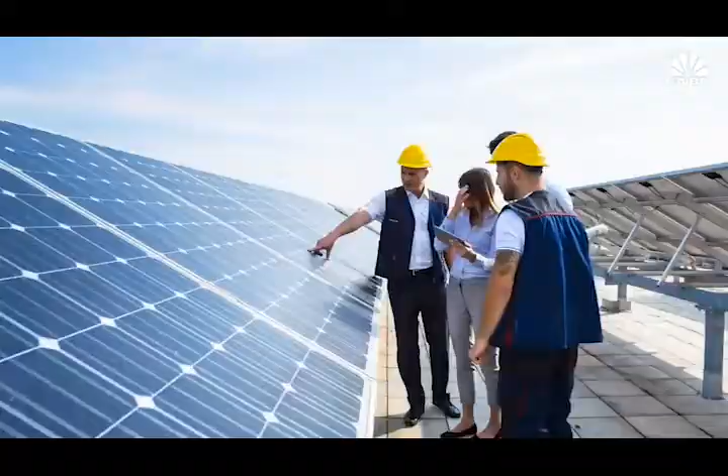Over the past decade, prices for solar panels and wind farms have reached all-time lows, leading to hundreds of gigawatts worth of new renewable energy generation. As the saying goes, though, the wind isn't always blowing and the sun isn't always shining. If, for example, it's a beautiful sunny day and we've got a superabundance of electricity, we can't use it. The question of how to firm renewables, that is, ensuring there's always energy on demand, no matter the time of day or weather, is one of the biggest challenges in the industry.

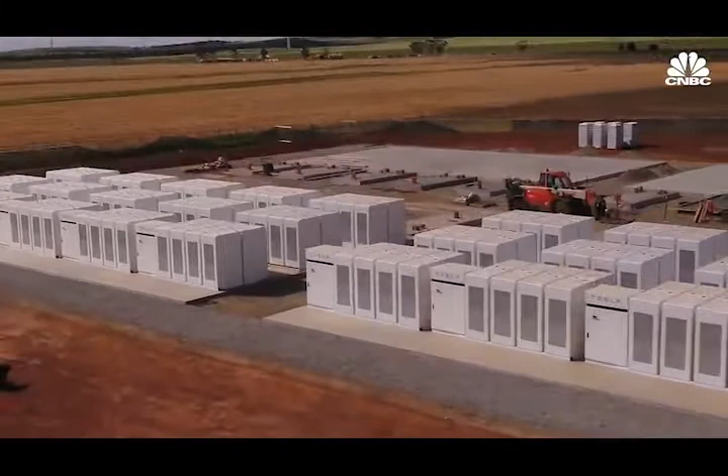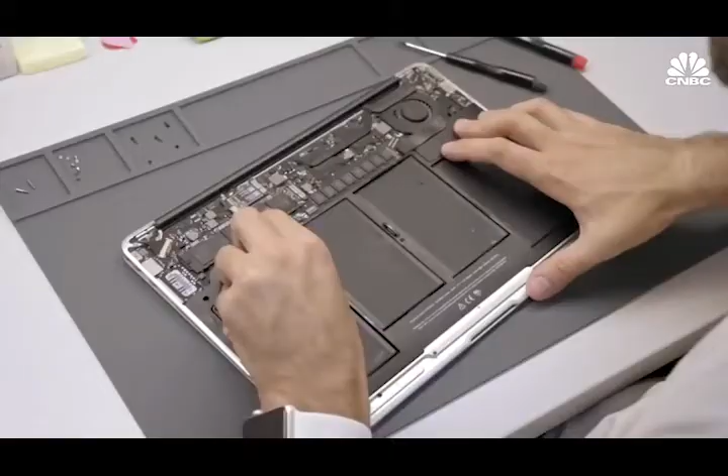We need a good way to store energy for later, and the main option right now is lithium-ion batteries. You see them in products like Tesla's home battery, the Powerwall, and utility-scale system, the Powerpack. But though lithium-ion is dropping in price, experts say it will remain too expensive for most grid-scale applications. To get to battery for the electrical grid, we need to look at a further cost reduction of 10 to 20x. Right now, lithium-ion batteries just can't store more than 4 hours worth of energy at a price point that would make sense. Plus, they pose a fire risk, and their ability to hold a charge fades over time.

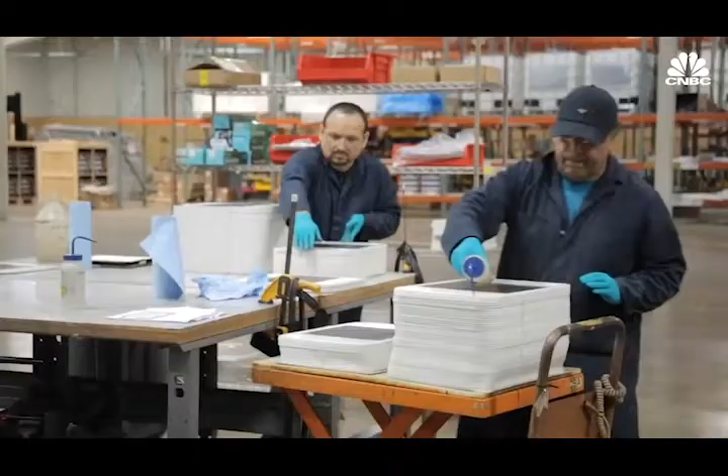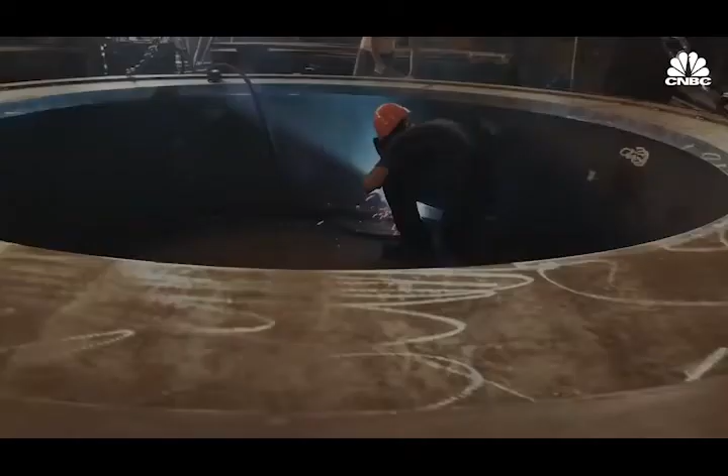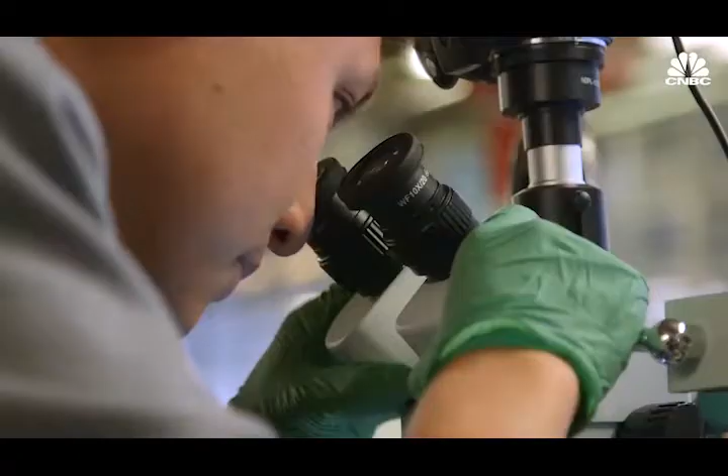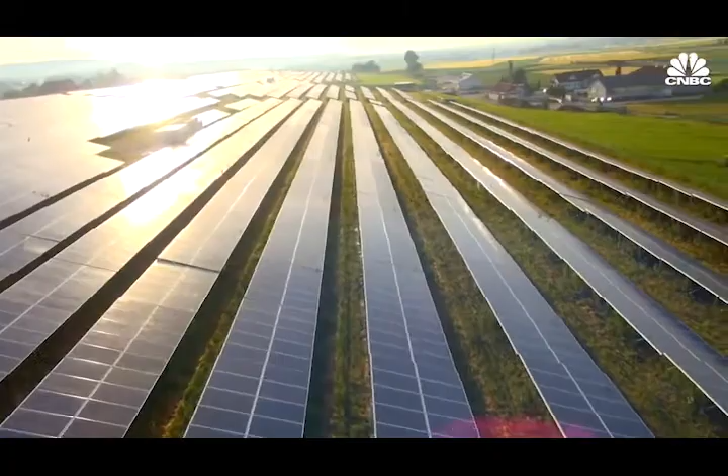To address this, there's a cadre of entrepreneurs experimenting with a variety of different solutions. Now we're seeing flow batteries, which are liquid batteries, and we're seeing other forms of storage that are not chemical or battery-based storage. And each has serious potential. We looked at materials on the periodic table that were actually going to be cost competitive from day one. Primus Power's flow battery is a workhorse. Thermal energy storage has a pretty unique opportunity to be extremely low cost. Our solution will last 30 plus years without any degradation in that performance. Which technologies prevail remains to be seen, but one thing is clear. For renewables to truly compete with fossil fuels, we need to figure out a better way to store energy.

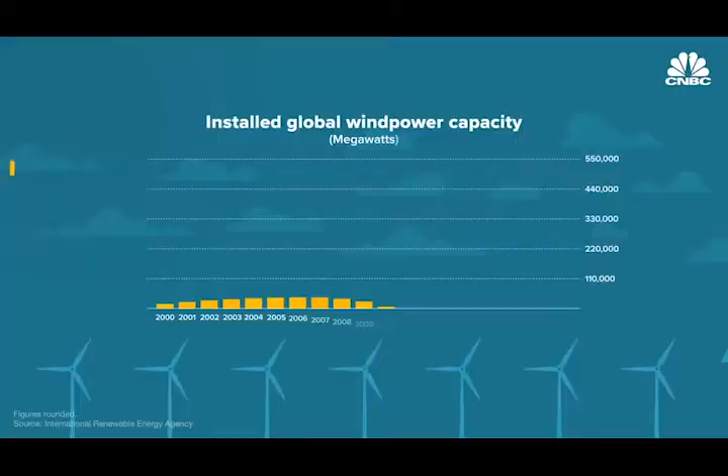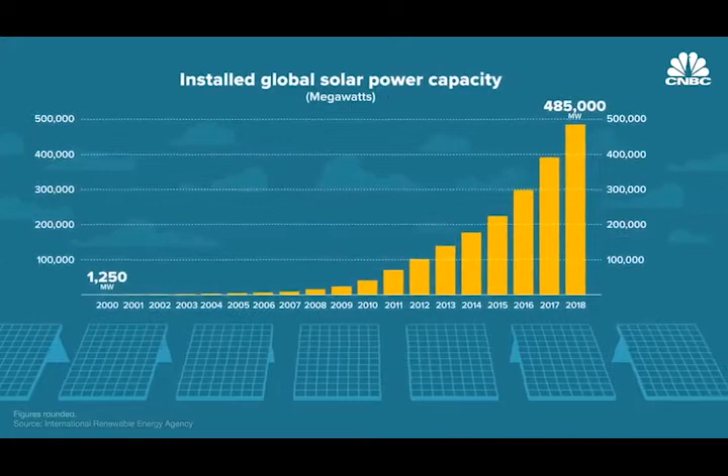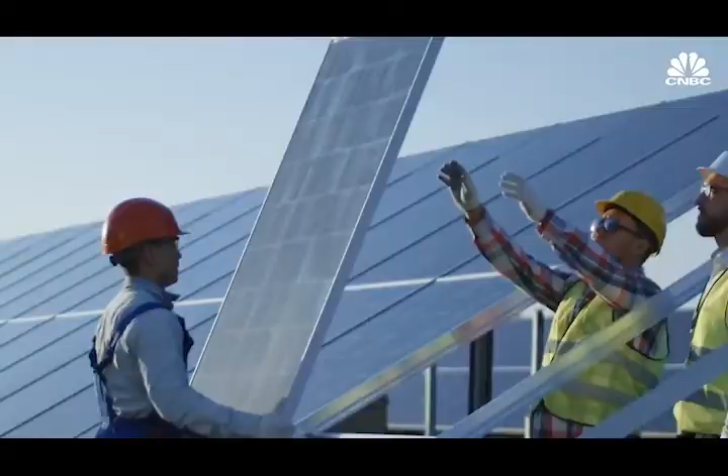From 2000 to 2018, installed wind power grew from 17,000 megawatts to over 563,000 megawatts, and solar power grew from a mere 1,250 megawatts to 485,000 megawatts. And it's not stopping there. Renewables are expected to grow an additional 50% over the next 5 years. We know today that solar PV and wind are the least expensive way to generate electricity. In particular, the price of solar photovoltaics has plummeted far faster than all forecasts predicted, after China flooded the market with cheap panels in the late 2000s. All the Wall Street analysts did not believe that solar was going to ever stand on its own without subsidies. Well, a few years later, even the most conservative analysts started realizing that actually solar was going to become economic in most parts of the world pretty quickly.

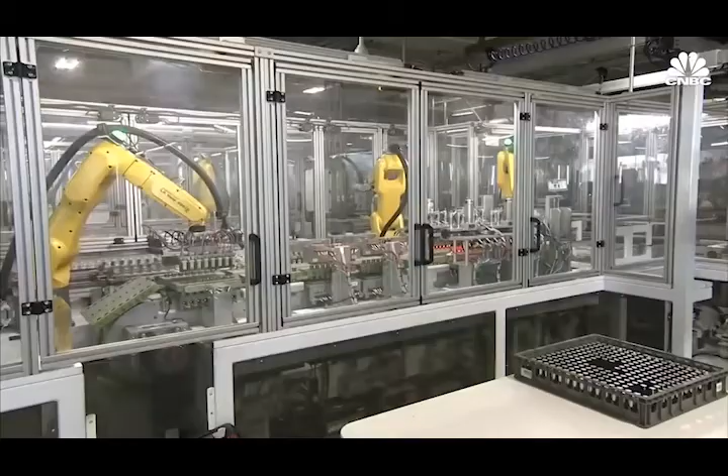And as solar's gotten cheaper, so too have lithium-ion batteries, the technology that powers electric vehicles, our cell phones, and laptops. And thanks to improved manufacturing techniques and economies of scale, costs have fallen 85% since 2010. Now, wind or solar plus battery storage is oftentimes more economical than peaker plants, that is, power plants that only fire when demand is high. Tesla, for example, built the world's largest lithium-ion battery in Australia, pairing it with a wind farm to deliver electricity during peak hours. But this doesn't mean lithium-ion is necessarily economical for other grid applications.

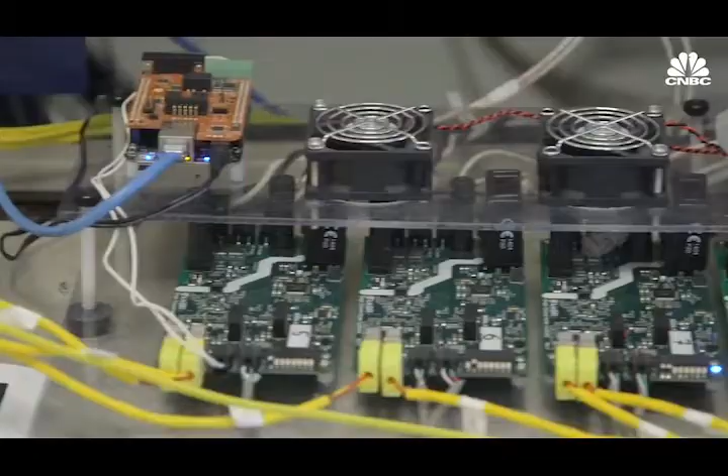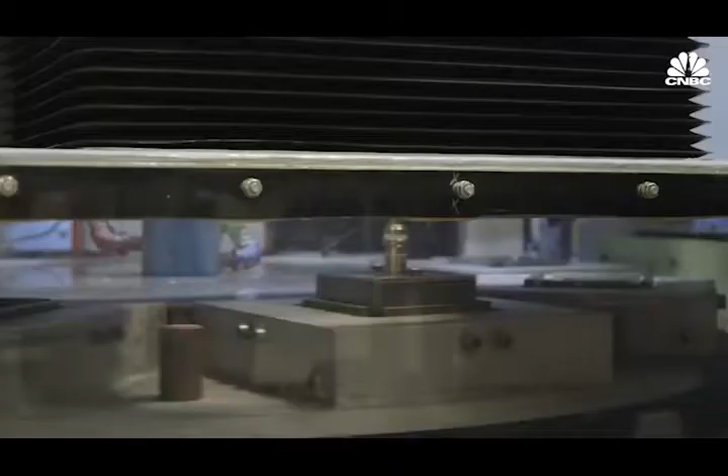We don't really see the cost structure coming down to the point where it can serve those tens to hundreds of hours applications. Basically, the market is ripe for competition. There are dozens of chemistries being looked at today. There are hundreds of companies working on scaling up and manufacturing new battery technology. Lithium-ion has done remarkable things for technology, but let's go to something far better.

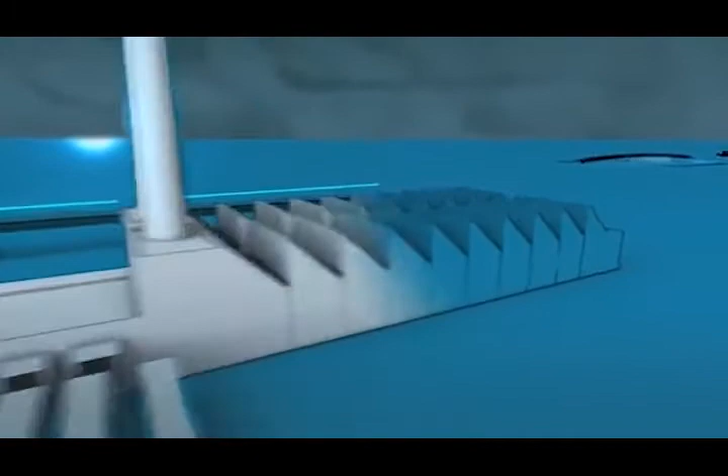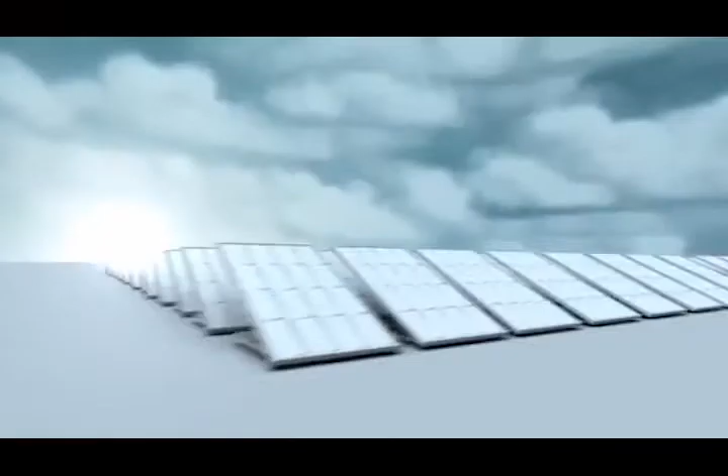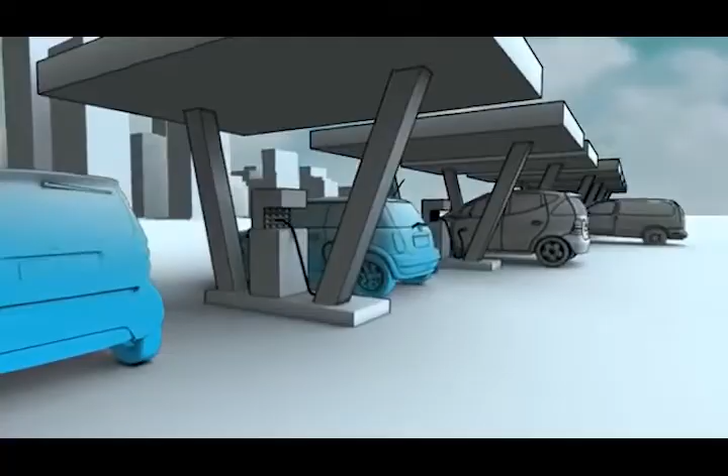What is a smart grid? A smart grid is an intelligent, digitized energy network delivering electricity in an optimal way from source to consumption. This is achieved by integrating information, telecommunication, and power technologies with the existing electricity system. The benefits of a smart grid include improved efficiency and reliability of the electricity supply, integration of more renewable energy into existing networks, supporting the development of electric vehicles at scale, new solutions for customers to optimize their electricity consumption, reduction of carbon emissions.

Smart grid is not just about improving the existing infrastructure that empowers our world. It is about realizing the full potential of what we can offer. New transport solutions, support for new economies, and to use the resources we have in the most effective and efficient manner. The World Economic Forum September 2010 report, Accelerating Successful Smart Grid Pilots, developed in partnership with Accenture and industry experts from across the smart grid value chain, outlines the industry's challenges and conditions for success.

Governments are increasingly recognizing the value of smart grids. China aims at building a strong smart grid by 2020. The US has dedicated $4.5 billion of its fiscal stimulus package. Significant initiatives are currently underway in Europe, Japan, Australia, and Korea. Are smart grids guaranteed to succeed? To ensure that public and private money is spent effectively, smart grid pilots must be successful in testing all aspects. A poorly planned and executed pilot can set back the adoption of smart grids and negatively impact the public perception of low-carbon technologies. Deploying smart grids at scale will be challenging, but successful pilot projects can set the direction. From discussions and research in some of the 90 pilot projects underway worldwide, emerged a series of lessons that can improve the effectiveness of existing and planned pilots and accelerate their transition to full-scale rollout.

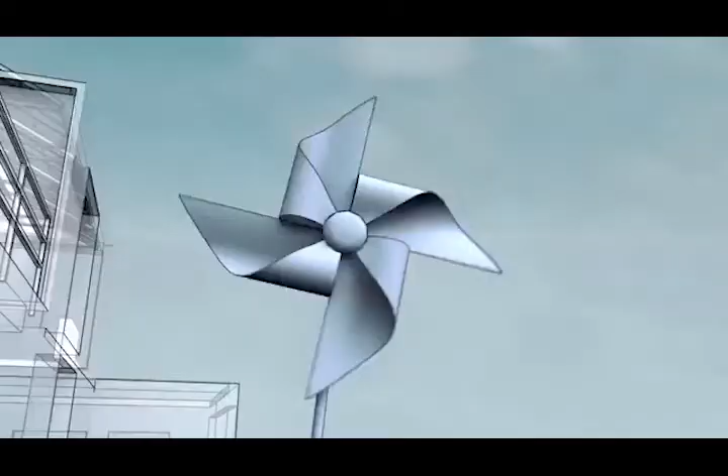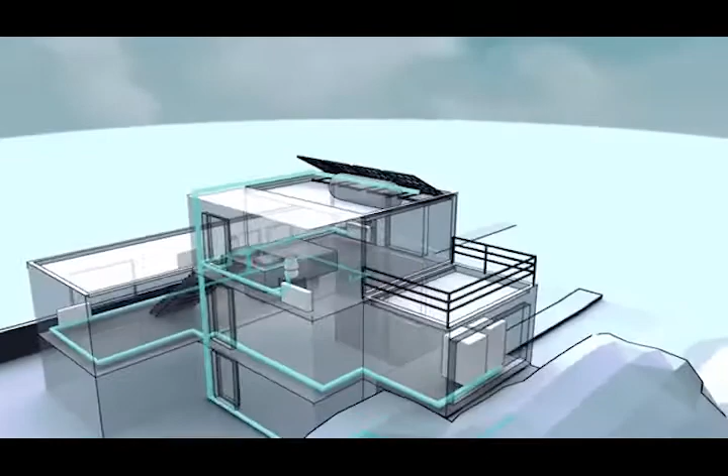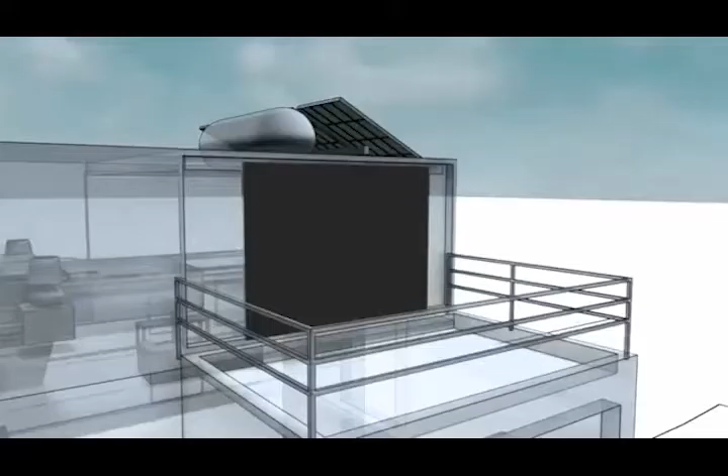Pilots should be used to improve regulatory incentives. Regulators have a critical role to play in creating innovation reward schemes that align incentives across the electricity value chain and encourage utilities and their partners to develop new technologies, operating and business models, while acknowledging the risks involved. Pilots need to develop greater consumer insight and systematically engage with consumers. Utilities will need to develop new business models, attractive everyday customer value propositions, and ways to communicate them clearly to ensure adoption. In my mind, the most important success factor is consumer acceptance. Having a smart grid pilot that provides value to consumers, that provides applications that help consumers reduce their energy bill and gain visibility and control will, I think, provide the foundation for popular support for smart grid investments throughout the industry. Decision makers need to take on board these recommendations to deliver smart grids, a cornerstone for a low-carbon, efficient, and secure energy future.

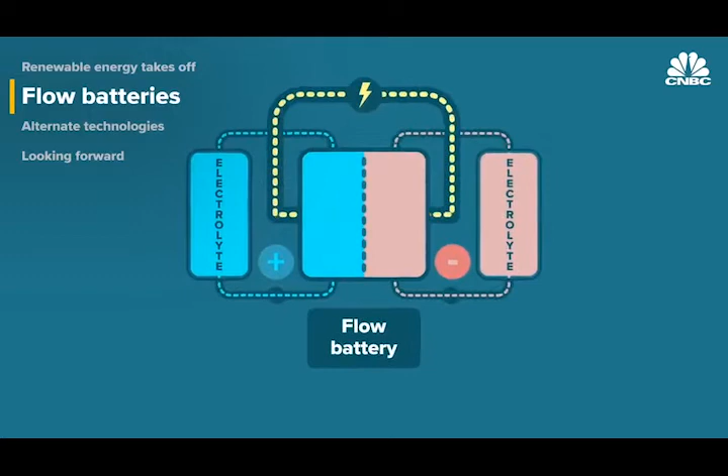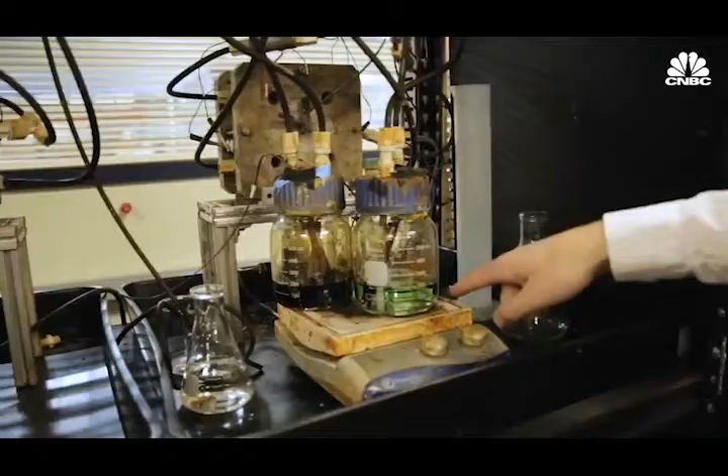Unlike lithium-ion, flow batteries store liquid electrolyte in external tanks, meaning the energy from the electrolyte and the actual source of power generation are decoupled. With lithium-ion tech, the electrolyte is stored within the battery itself. Electrolyte chemistries vary, but across the board, these aqueous systems don't pose a fire risk, and most don't face the same issues with capacity fade. Once they scale up their manufacturing, these companies say they'll be price competitive with lithium-ion.

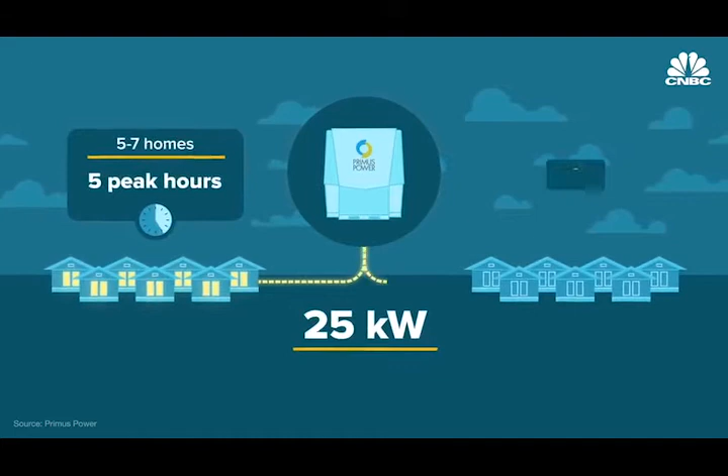Hayward, California-based Primus Power has been working in the space since 2009 and uses a zinc bromide chemistry. So far, it's raised over $100 million in funding, including a number of government grants from agencies like the Department of Energy and the California Energy Commission. Primus's modular energy pod provides 25 kilowatts of power, enough to power 5 to 7 homes for 5 hours during times of peak energy demand, and for 12 to 15 hours during off-peak hours. Most systems use multiple energy pods, though, to further boost capacity.

The company says what sets it apart is its simplified system. So instead of 2 tanks, which every other flow battery has, Primus only has 1. And we are able to separate the electrochemical species by taking advantage of the density differences between the zinc bromide and the bromine itself and the more aqueous portion of that electrolyte.

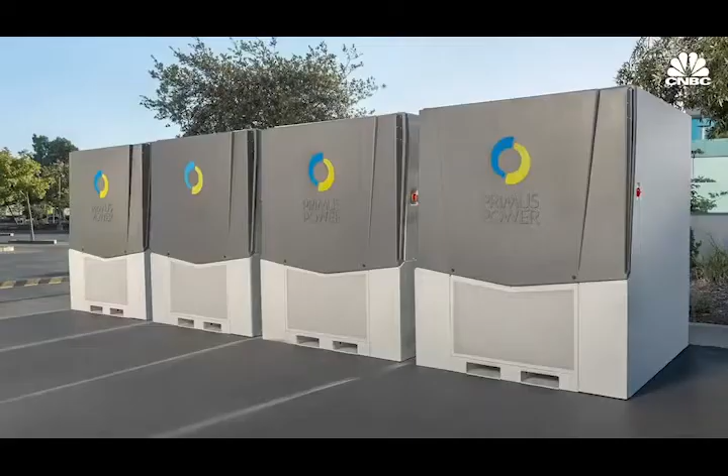To date, Primus has shipped 25 of its battery systems to customers across the US and Asia, including a San Diego military base, Microsoft, and a Chinese wind turbine manufacturer. It expects to ship an additional 500 systems over the next 2 years. Future customers are either independent power producers that are doing solar plus storage at utility scale or larger commercial enterprises.

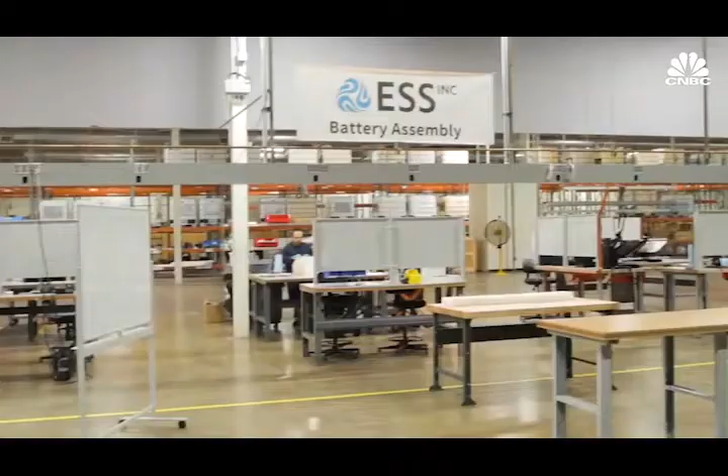Also operating in this space is ESS Inc., an Oregon-based manufacturer of iron flow batteries, founded in 2011. Its systems are larger than Primus Power's. They're basically batteries in a shipping container, and they can provide anywhere from 100 kilowatts of power for 4 hours to 33 kilowatts for 12 hours, using an electrolyte made entirely of iron, salt, and water. When we came into this market, we wanted to come into it with a technology that was going to be very environmentally friendly. It was going to be very low cost. It didn't require a lot of volume on the production line to drive down costs.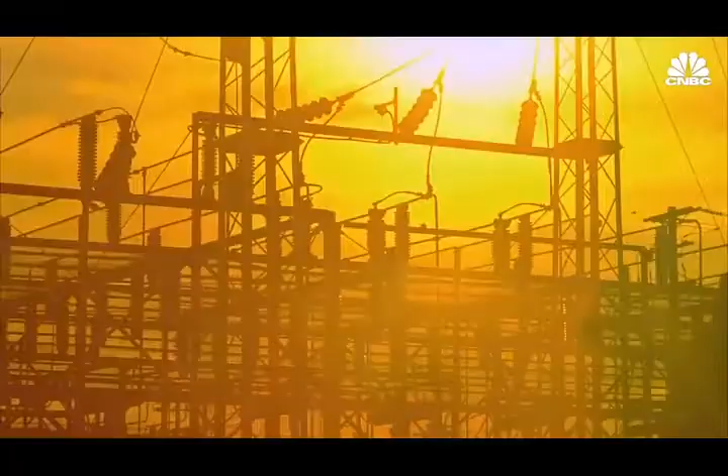ESS is backed by some major players like SoftBank Energy, the Bill Gates-led investor fund Breakthrough Energy Ventures, and insurance company Munich Re. Having an insurance policy is a big deal, since it will make risk-averse utility companies much more likely to partner with it. So far, ESS has 6 of its systems called energy warehouses operating in the field, and plans to install 20 more this year. It's also in the process of developing its Energy Center, which is aimed at utility-scale applications in the 100 megawatt plus range. That would be 1,000 times more power than a single energy warehouse.

We're planning to be at 250 megawatt hours of production capacity by the end of this year, which is probably a little over 10 times the capacity we had last year. And then eventually getting to a gigawatt hour of production capacity in the next couple years. So far, key customers include Pacto GD, a private Brazilian energy supplier, and UC San Diego.

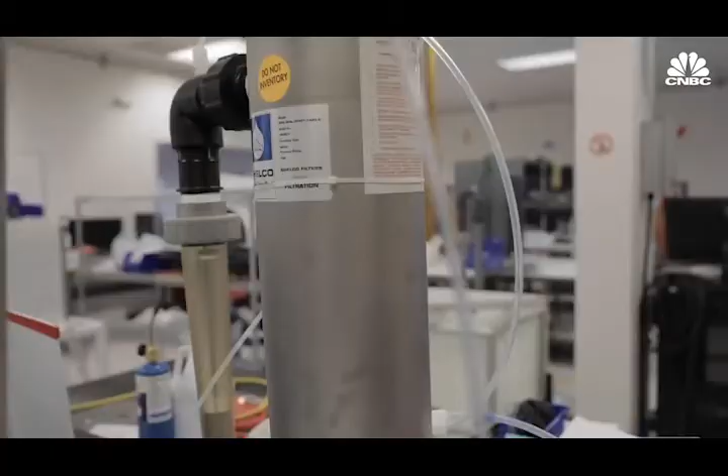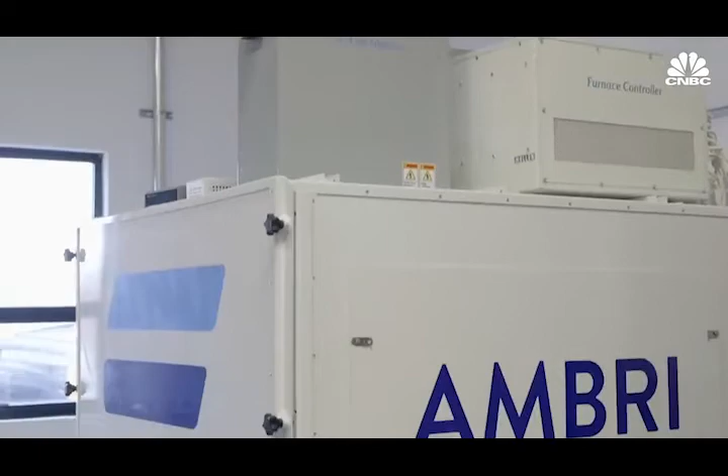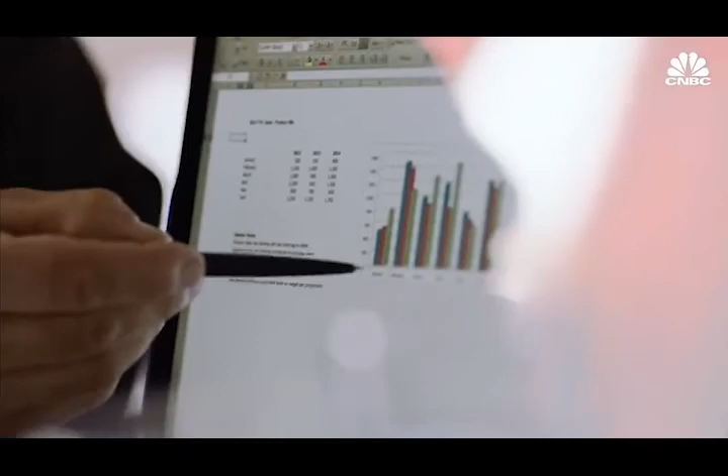But for all their potential, flow battery companies like Primus and ESS Inc. still aren't really designed to store energy for days or weeks on end. Many of those flow battery technologies still suffer from the same fundamental materials cost challenges that make them incapable of getting to tens or hundreds of hours of energy storage capacity. Other non-lithium-ion endeavors, such as the MIT spin-off Ambri, face the same problem with longer duration storage. Form Energy, a battery company with an undisclosed chemistry, is targeting the weeks or months-long storage market, but commercialization remains far off. So other companies are taking different approaches entirely.

Currently, about 96% of the world's energy storage comes from one technology, pumped hydro. This system is pretty straightforward. When there's excess energy on the grid, it's used to pump water uphill to a high elevation reservoir.

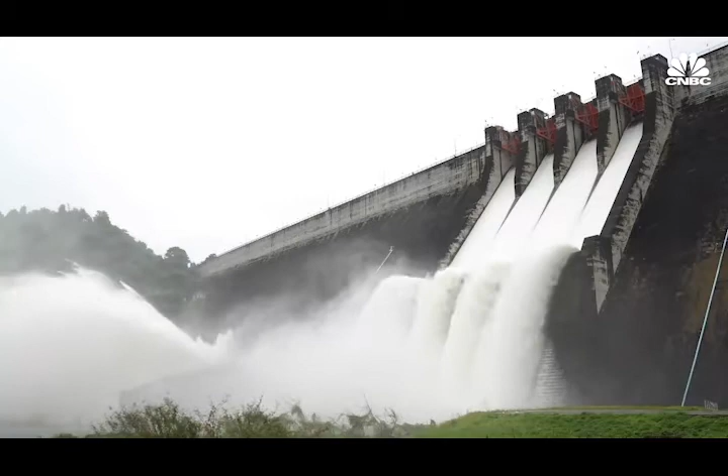Then, when there's energy demand, the water is released, driving a turbine as it flows into a reservoir below. But this requires a lot of land, disrupts the environment, and can only function in very specific geographies. Energy Vault, a gravity-based storage company founded in 2017, was inspired by the concept, but thinks it can offer more.

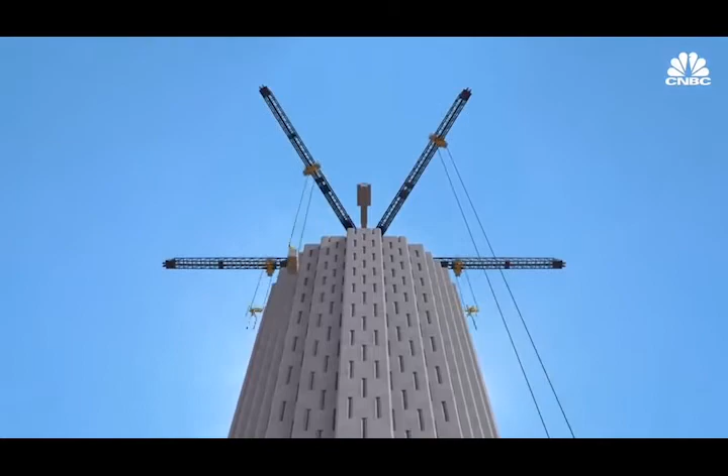And so we wanted to look at solving the storage problem with something much more environmental, much more low cost, much more scalable, and something that could be brought to market very quickly. Instead of moving water, Energy Vault uses cranes and wires to move 35-ton bricks up and down, depending on energy needs, in a process that's automated with machine vision software.

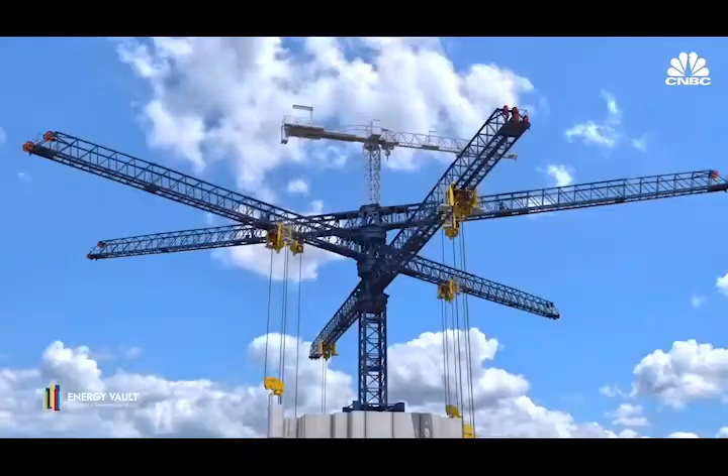We have a six-arm tower crane that's utilizing excess solar or wind to drive motors and generators that lift and stack the bricks in a very specific sequence. Then when the power is needed from the grid, that same system will lower the bricks and discharge the electricity. This system is sized for utility-scale operation.

The company says a standard installation could include 20 towers, providing a total of 350 megawatt-hours of storage capacity, enough to power around 40,000 homes for 24 hours. Some of our customers are looking at very large deployments of multiple systems so that they'll have that power on demand for weeks and months and whenever it's going to be required.

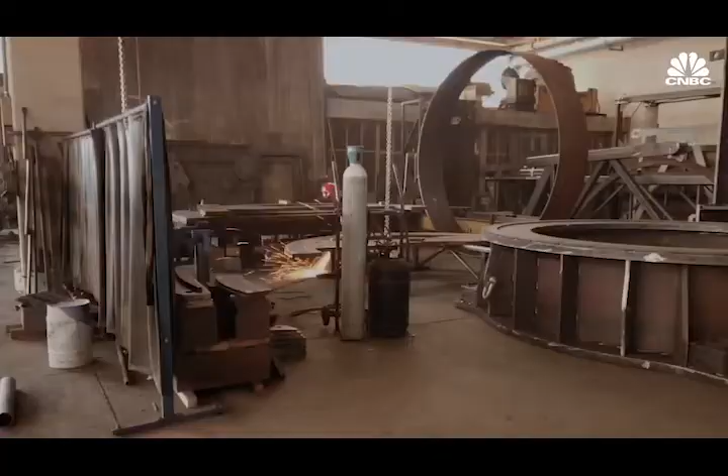The company recently received $110 million in funding from SoftBank Vision Fund, and it's building out a test facility in Switzerland, as well as a plant for India's Tata Power Company. But some say the sheer size of the operation means it just can't be a replacement for chemical batteries.

Sounds very simple. However, the energy density on those systems is very low. And so that's where we believe chemical-based storage still has an advantage in terms of a footprint. You can't install a gravity-based system in the city, but you'd have to install it outside in the remote areas.

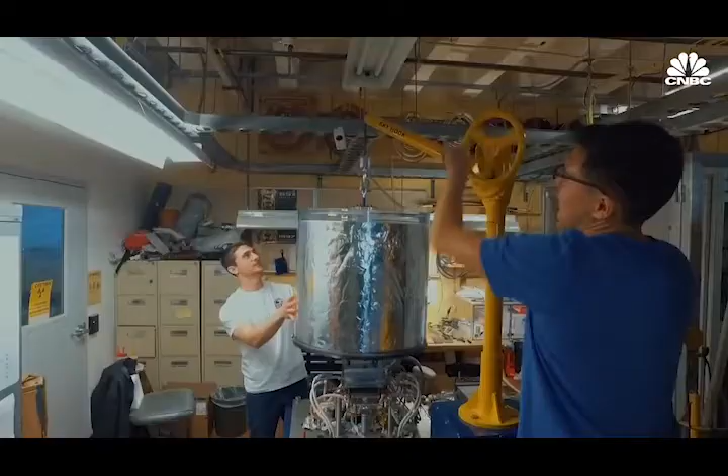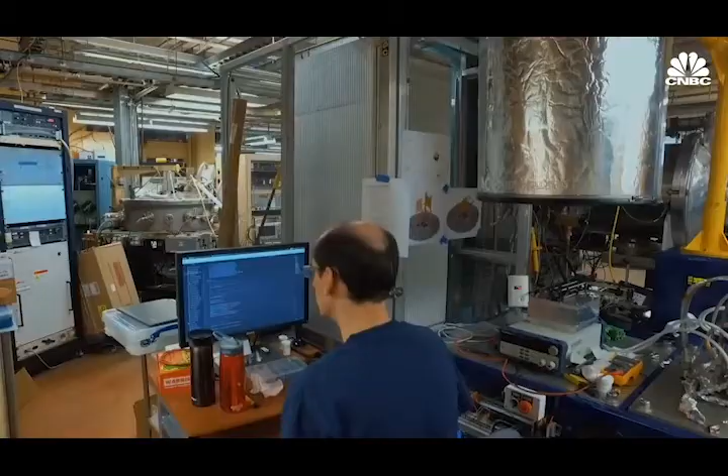Then there's thermal storage. It's still an emerging technology in this space, but it has the potential to store energy for longer than flow batteries, with a smaller footprint than gravity-based systems. Berkeley, California-based Antora Energy, founded in 2017, is taking on this challenge. Basically, when there's excess electricity on the grid, that's used to heat up Antora's cheap carbon blocks, which are insulated inside a container. When needed, that heat is then converted back into electricity using a heat engine.

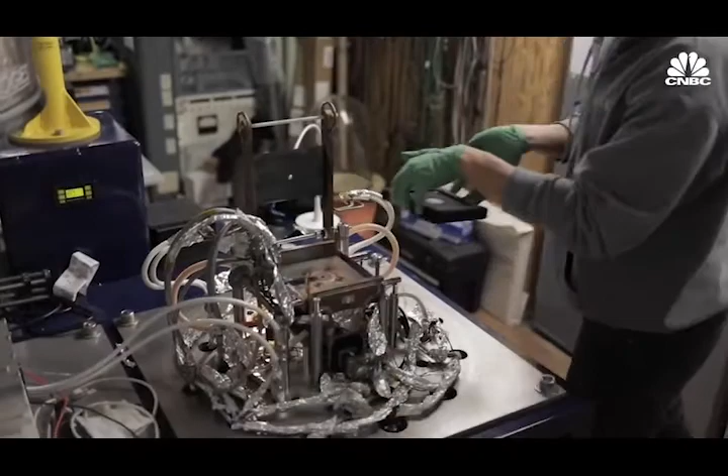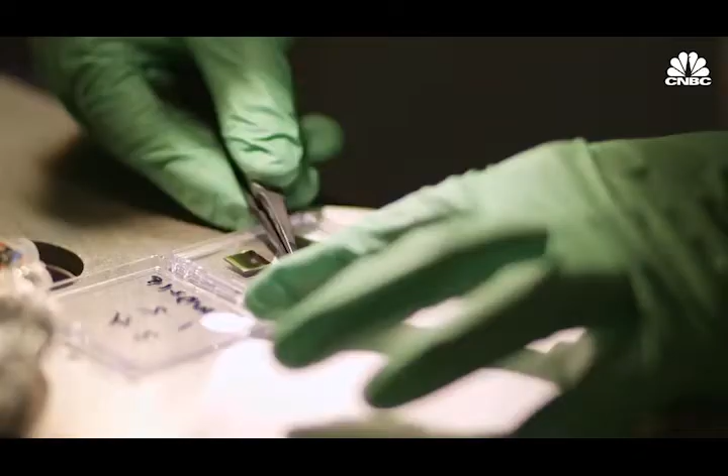Typically, this would be a steam or gas turbine, but Briggs says this tech is just too expensive and has prevented thermal storage solutions from working out in the past. So Antora has developed a novel type of heat engine called a thermophotovoltaic heat engine, or TPV for short, which is basically just a solar cell, but instead of capturing sunlight and converting that to electricity, this solar cell captures light radiated from the hot storage medium and converts that to electricity.

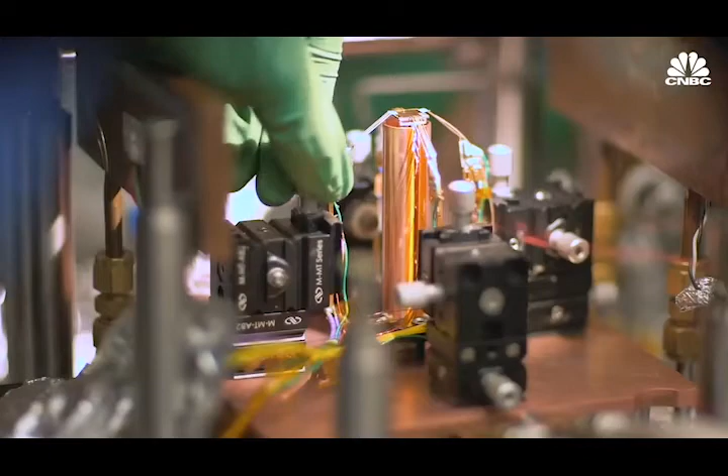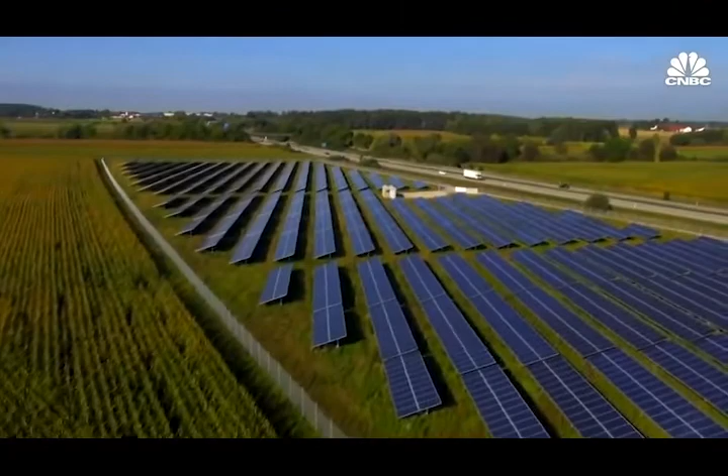So it's electricity in, electricity out, and it's stored in ultra-cheap raw materials as heat in the meantime. Recently, Antora received funding from a joint venture between the Department of Energy and Shell, who are excited by the company's potential to provide days or weeks-long storage. We think that solves a need that is currently and will continue to be unmet by lithium-ion batteries, and that will sort of enable the next wave of integration of renewables on the grid.

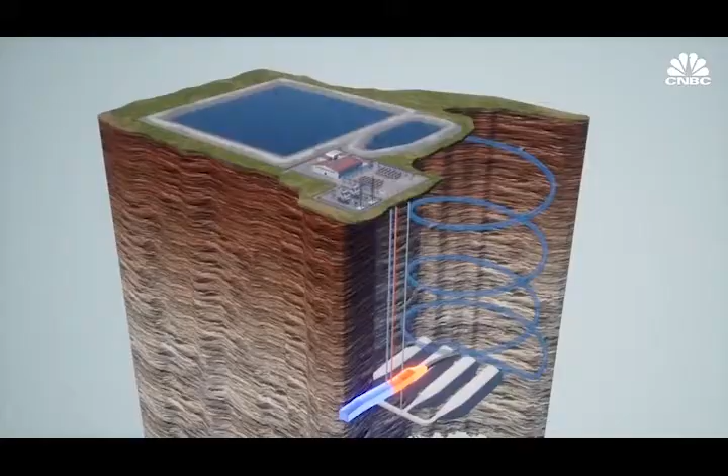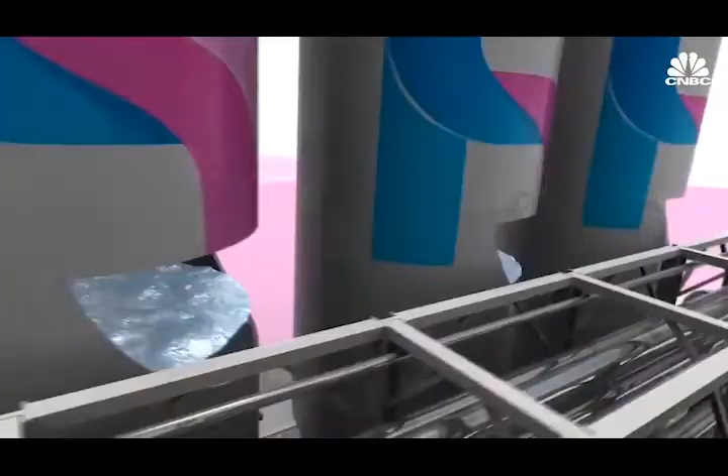It's still early days for Antora and Energy Vault, though, and there's definitely other creative solutions in the mix. For example, Toronto-based Hydrostor is converting surplus electricity into compressed air, and UK and US-based Highview Power is pursuing cryogenic storage. That is, using excess energy to cool down air to the point where it liquefies. These ideas may seem far out, but investment is pouring in, and projects are being piloted around the world.

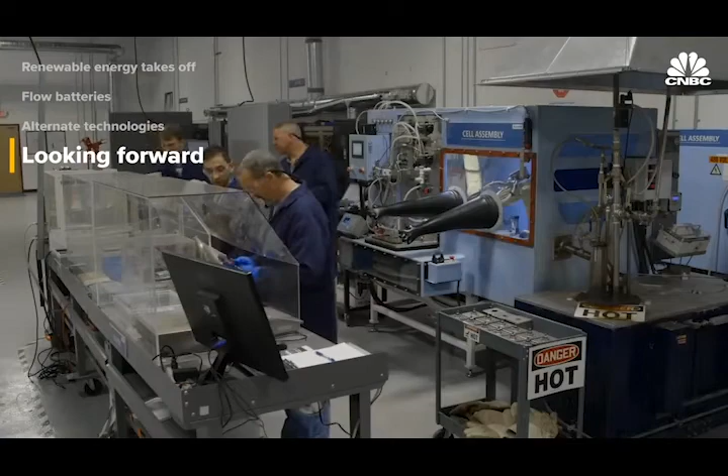While these companies are all vying to be the cheapest, safest, and longest lasting, many also recognize that this is a market with many niches, and therefore the potential for multiple winners. In the residential and commercial areas, you're going to have a certain type of technology. A lot of it will probably be battery-based.

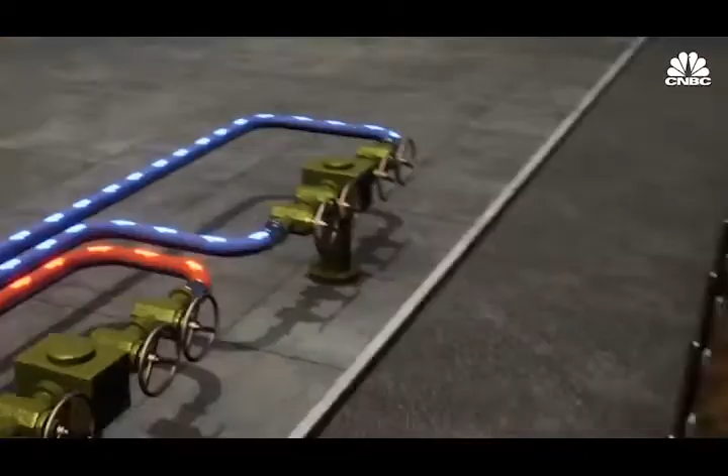I think as you get to utility scale and grid scale, you're going to see some batteries, you're going to see other types of compressed air and liquid air solutions, and then you're going to see some of the gravity solutions that could be scaled. Overall, the energy storage market is predicted to attract $620 billion in investments by 2040.

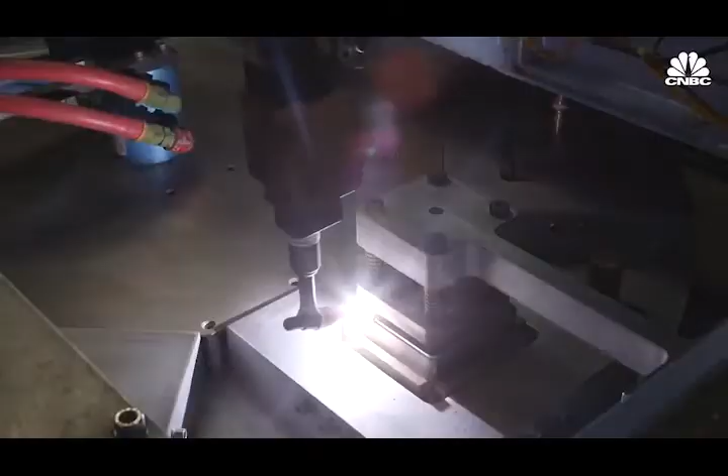But as always, it's going to be tough to get even the most promising ideas to market. No matter if the raw materials were dirt cheap, the initial cost of a first system is essentially astronomical. Of course, government policies and incentives could play a major role as well. There is a production tax credit on wind. There's an investment tax credit on solar.

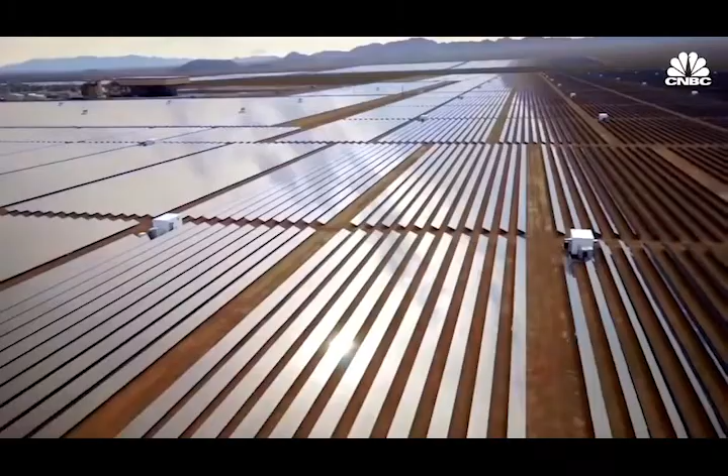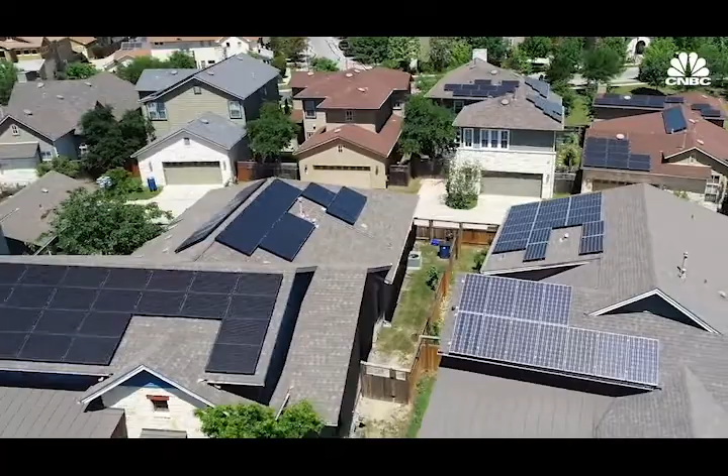We, in the battery community, would like to see an ITC for batteries in the same way that it is in existence for solar. Implementing a storage mandate, as California has done, is another policy that many are advocating.

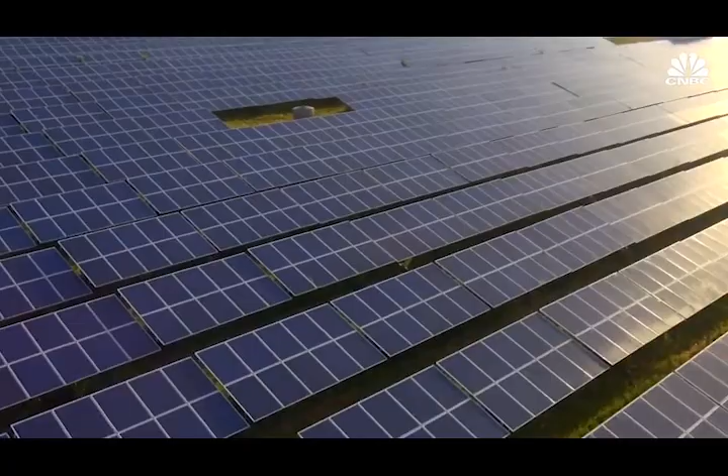When we get to roughly 20% of our peak demand available in storage, we will be able to run a renewable-only system because the mix of solar and wind, geothermal, biomass, all backed up with storage, will be enough to carry us through even some of these potentially long lulls. With the right mix of incentives and ingenuity, we're hopefully headed towards a future with a plethora of storage technologies.